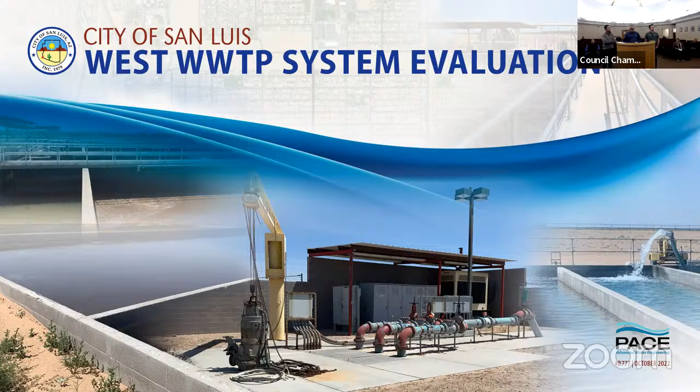As Eulogio has said, we have prepared an evaluation of the west plant for expansion. And we want to walk through some of that with you tonight. We want to look at the treatment process and the plant, identify what's there. We want to look at the deficiencies that we found in the existing plant and improvements to address those deficiencies. With that, we need to look at ADEQ's effluent requirements as this project would move forward.

Conceptual expansion opportunities and alternates is part of what we looked at as well. 3 to 5 different alternates, and then look at a potential timeline. With this, we will look at capital cost as well as a 20-year life cycle cost, where you tie capital and operational costs in together and look at that over a 20-year period.

We want to talk a little bit about opportunity that the city has in light of the Colorado River water cuts that were made to the state of Arizona, and you have water with both treatment facilities, about 2 million gallons of water a day. And so there's a potential opportunity to recognize that that's a tremendous commodity, and it's getting more and more valuable every single day because of things like the cuts going on in the Colorado River.

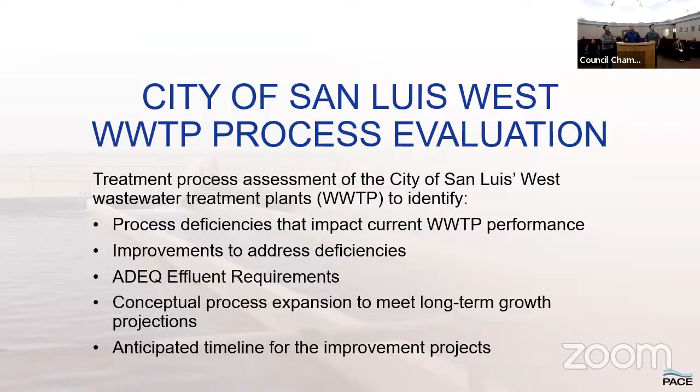And then we also want to just touch briefly on the impact of the Juan Sanchez lift station and the benefit to this project as well. So the first 6 slides we presented to council a couple of years ago when we got this initiated and started. So I'm not going to spend a ton of time, but I would welcome any questions as we go through this. It helps to understand, because we're going through a lot of information, and the more we can talk about it, the more helpful it's going to be to digest this information.

This is basically flows of the West Plant, and the things that are important to really know from all of this data is that the existing West Plant and the flows that should go to the West Plant are currently between 1.3 and 1.5 MGD, million gallons per day. And that's without diverting to the East Plant through the lift station. And that plant capacity is 1.5 million. So you're basically at capacity with that plant. That's really how all of this got started.

The East Plant has a capacity of 1 million, just to put it in perspective. And in total, with the 2.5 million gallons a day capacity, you're basically at 2 million gallons of flow going into those plants, just to give you an idea of where things are.

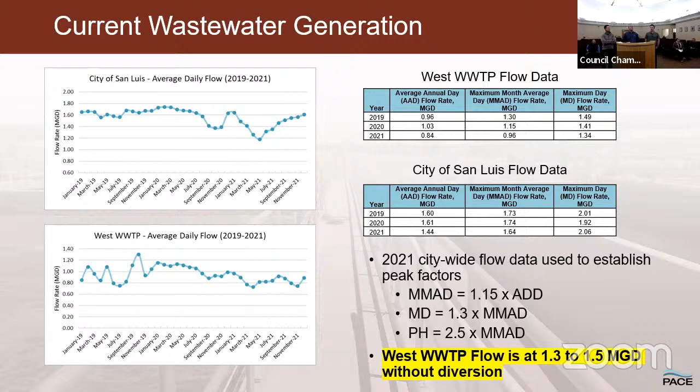So I mentioned the Juan Sanchez lift station, and the benefit of that lift station right now is currently taking 300,000 to 400,000 gallons a day to the East Plant, off the West Plant. The maximum that could be sent is 500,000 to 600,000 gallons a day to that East Plant. The benefit is that this really helps with the improvements made at the West Plant, enabling improvements without spending extra millions of dollars to provide capacity at that plant. If you didn't have this, or the East Plant, you'd have to try to do everything there and it would be more expensive at the West Plant.

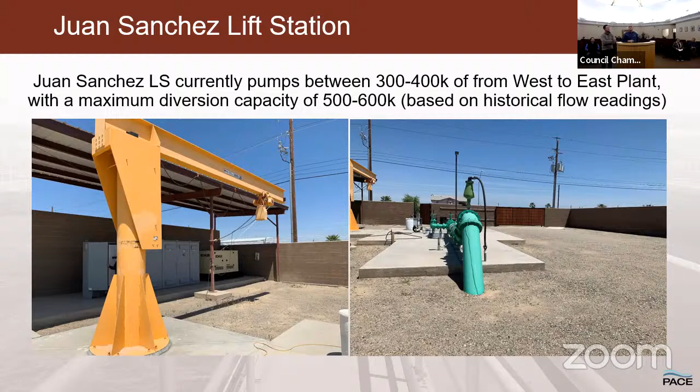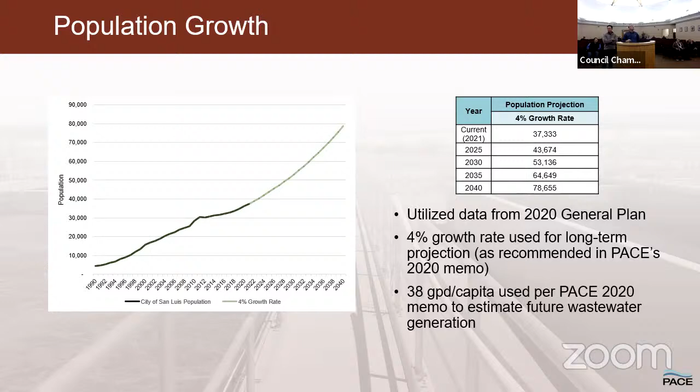So this is just to show the population growth that we utilized during our evaluation, 4% growth, which was again utilized from a couple years ago. Obviously that will vary depending upon what happens. We know that you all are growing quickly. We also took into consideration the zoning map and the open areas available for growth in the west part of the city.

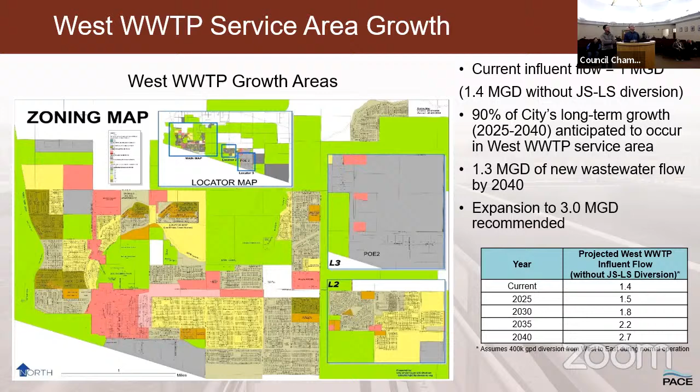So again, I said I was going to go through those quickly and I did. Are there any questions at this point? Any questions from council? Not whatsoever? You're doing okay, good. Thank you, all. Thank you.

So then what we want to do is get into a little more detail on the technical side of what's there, what we found, and what we're possibly suggesting moving forward. With that, I want to turn it over to Young Doe, senior engineer at Pace, and also with me is Taylor Pierce, project manager at Pace.

So just to introduce, I know Eulogio had mentioned names, but now we have faces with the names. Thanks, Mike. Okay, I'll go through this again real quickly too, because we have a lot of slides and not a lot of time. So basically what you're seeing up here is just the existing SBR process. SBR means the treatment process that the facility is using to treat the wastewater. I won't go through the whole process, but it's basically just a map of the site, of the facility.

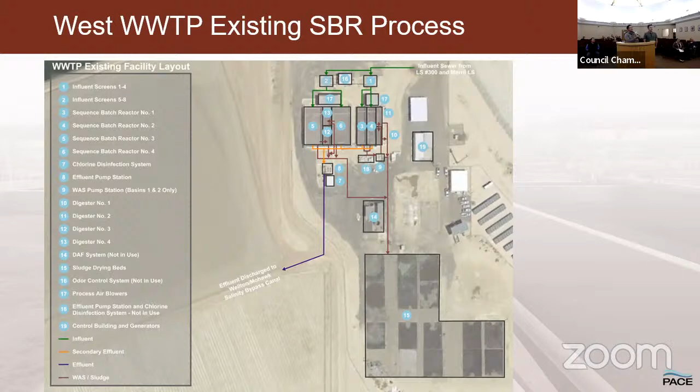We basically went through the whole entire facility and did the evaluation, looked at every single component of the wastewater treatment plant, the headworks, the secondary process. We went through and evaluated each one of them. As you can see, for the most part the facility is meeting its capacity, it's able to do what it's supposed to do. There are some deficiencies that we found, but it's able to treat the wastewater coming in right now, so that's kind of the takeaway. As we go through the next few slides, we'll talk about the major deficiencies we saw.

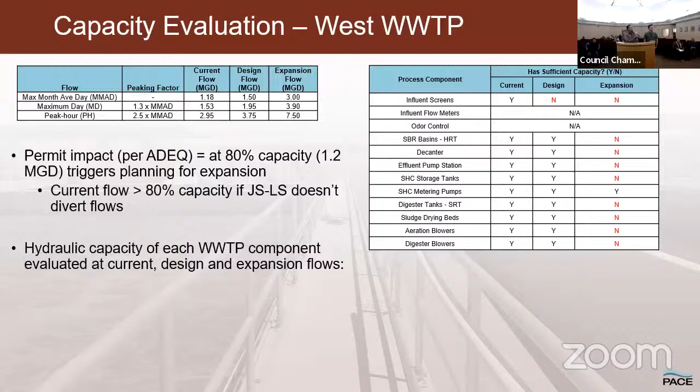The main ones we identified during the evaluation are mainly the screen, the influent screen. What we found is that even though the screen has the capacity, the flow coming into the screen is diverted in a way that one basin gets more flow than the other. There's a total of mainly 3 basins: basin 1 and 2, which are considered together, and then basin 3 and 4 are 2 separate basins. The flow is being overloaded to one side. The recommendation here is that later on, when we make the upgrades, we modify the piping to allow all the basins to get the flow evenly.

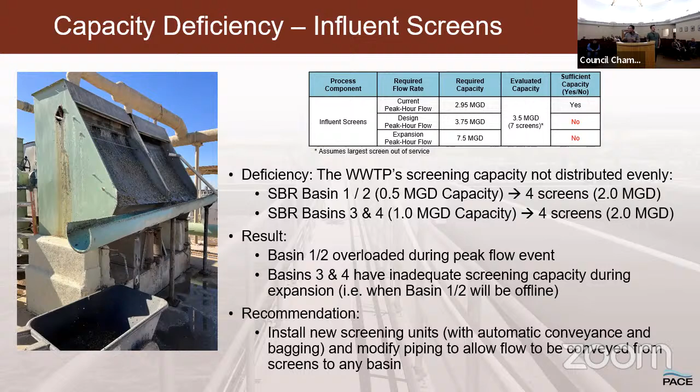And then as far as the rest of the facility, most of it has to do more with either the structure component of it or some of the equipment. So for example, we spoke about the screen, the influent flow meter isn't functioning properly, so we can't really see the proper recording of the flow coming in. Both the SBR basins, the effluent pump stations, those components, we're seeing structural deterioration in some of the areas.

And then there's some issues we saw with the chlorine disinfection system, with the piping being exposed and potentially damaging the equipment. And then in the digester, we also saw structural issues. I'm going through that quickly because in essence, all of these are issues that are concerning, but they do not impact the treatment component of the facility itself.

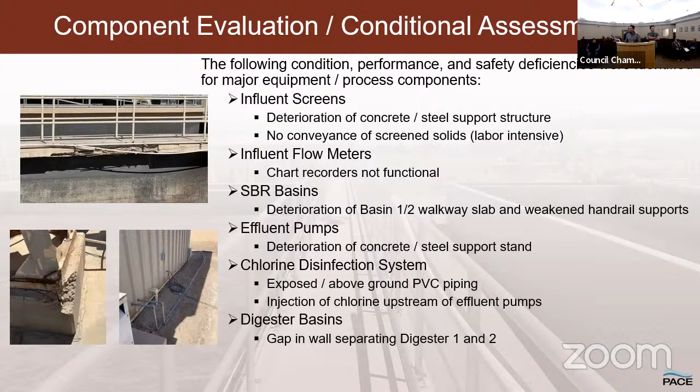So at the end of the day, what we're basically saying is that the treatment plant is getting to the capacity that it was designed for. And so now, with the growth of the city, what we recommend is to expand the facility into the next phase, which is 3 MGD. As far as all the other components we spoke about, the screens, the basins themselves, some of the equipment, those can wait, and you can make those improvements as you upgrade the facility. It's essentially the quick summary of what we're showing here.

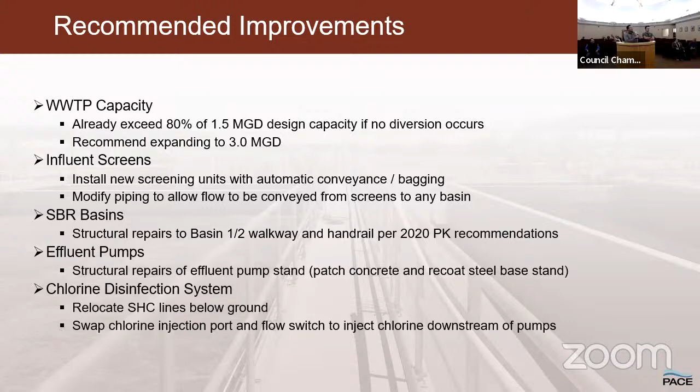And then, going back to what Mike was saying before, one of the benefits that the city has right now is the fact that you have the Juan Sanchez lift station. Because right now, if you're at capacity, you're at 1.5 MGD, the city can only treat 1.5 MGD. For you to go in there and make any expansion, there's no way for you to divert the flow to make those improvements. So with the fact that you have the lift station, you can actually divert a third of that flow, going to the east side.

And if you recall earlier, I said that the basins are divided into three - you have basin 1 and 2 that operates as one basin, basin 3, and then basin 4. So if you have the ability to divert a third of your flow, that allows us to take a third out and be able to go in there and do improvements to help expand the facility. That's the advantage that you have here, but that window is going to be closing soon as development increases in the city, on the east side.

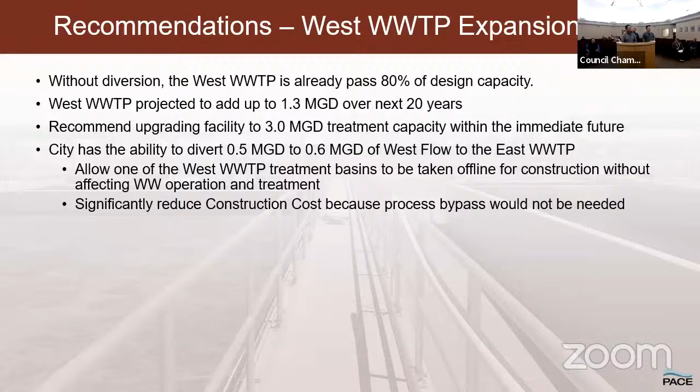On the east side particularly, exactly, yeah. And so, with that, Eloy Hill asked us to look at the different expansion options.

So what we did was we looked at 5 different treatment processes that can be expanded at the facility. And of those, we selected the MLE process, the MBR process, and the SBR process to further expand on. The reason why we didn't select the other 2, the MBBR and the IFAS, is because they required additional infrastructure that was similar to the first 3. So that just means those 2 processes would just be more cost on top of the process we discussed there.

The other thing we also have to look at is going back to what Mike spoke about in regards to the effluent quality, and the fact that the effluent is really a commodity. And so when we looked at these options, we evaluated what type of effluent it was producing, how clean, and the benefits that you can get from it.

So in Arizona, all of the treatment plants that we construct have to meet certain effluent requirements, and ADEQ requires BADCT, which is best available demonstrated control technology. Now there's another effluent level that's a little bit higher than that, it's called Class A+, which is basically unrestricted reuse, that you can use the effluent for pretty much any unrestricted irrigation and things like that. And BADCT is just one level below it. So when we evaluate the different options here, we also looked into how we can transition it from just meeting BADCT to actually meeting Class A+ as well, because this could be a commodity that the city can use in the future.

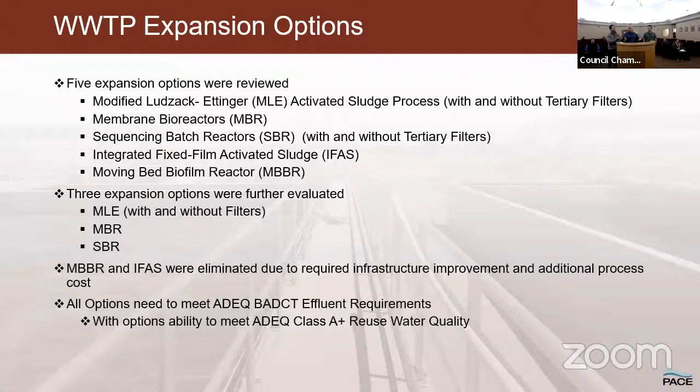So obviously you have to have the right buyer and all of that type of stuff. But the concept is to get yourself in a position - I know that in talking to Lohio, there's been other opportunities where you've had industries interested in coming and being in San Luis, but they were concerned maybe about the water or wastewater or whatever. Here's an opportunity where you can offer them 2 million gallons a day at this Class A plus quality. So just to keep in mind as we're going through this.

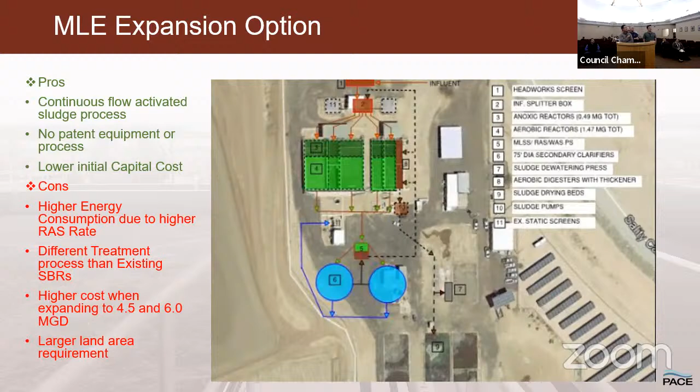What they are operating right now is what we call an SBR, a sequencing batch reactor. This process also has a higher cost when you expand further into phases 4 and 5, which is the 4.5 MGD and the 6 MGD. And then the other thing is that it also has a larger land area requirement.

So just to clarify on that, part of what our proposal and the interest was from the city and Elohio is that we look at not just the first expansion, but 2 additional expansions beyond that. Just so that you have an idea in your pocket that if a developer does come and wants to do something and you have to expand, you have a plan - here's the plan, and here's what the costs look like in 2022. So that was really the main reason.

Yes ma'am, I got a question. When you said expansions, 2 more expansions, what's the time frame? How long does that take? Until you would need it, based on current growth, over 20 years.

But if things change with development or land use, zoning, stuff like that, can really accelerate that schedule. But based on that first evaluation we did over 2 years ago, you're 20 years before you run out of capacity.

Mayor, also, one of the reasons that this was added to their scope was, in the recent past, within the last 5 years, we've received industries that have been interested in San Luis. And one of the big requirements was both water and wastewater. So at least this is covering the wastewater aspect of it.

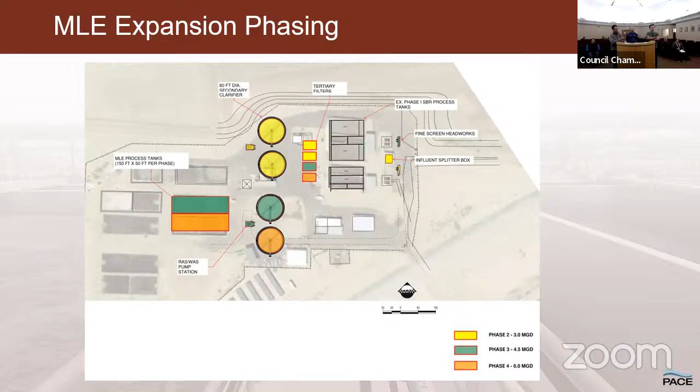So, sorry. Taylor, can you talk about this real quickly, just because I'm talking a little bit.

You've run out of capacity at the existing basins, so you're building new basins from phase 2 and then adding to it in phase 3 and phase 4. So it has the highest capital cost out of all of the options that we considered, but it is the one that you guys are most familiar with. SBRs are proprietary in that it fills, decants, and goes through a proprietary process. So that all has to be purchased through a manufacturer. And so there is a markup on some equipment when you buy that.

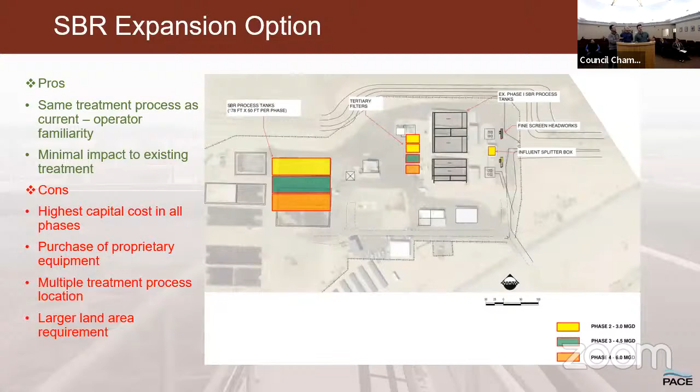It does take up a larger chunk of land, and you do have space available at the facility. So it's not necessarily a point of concern immediately, but as you continue to grow, you will start to eat into what's available there.

Yeah, so the last option here is the MBR, the membrane bioreactor. And the pros to this is it produces the highest effluent quality. And I did mention this earlier in the last two options, that the MBR is a microfiltration process, and the effluent that comes out of it is extremely high quality, a lot higher quality than the Class A+ and the BADCT that was required by ADEQ.

Now, the other two options can get up to Class A+ if you add in tertiary filtration, but that just means that you're adding additional capital costs. The MBR itself is inherently a microfiltration process, and so therefore it doesn't need any additional filtration. So again, the pros to that is the highest effluent quality of all of the options. It also has the smallest footprint.

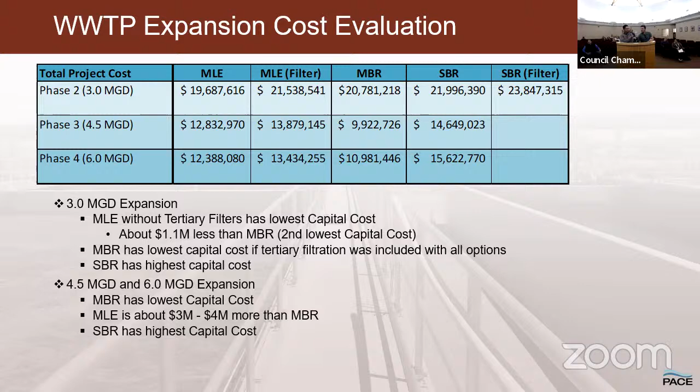Okay, go back to the previous slide. On the cons, is it slightly higher operating cost, percentage wise? Any idea? Is it 10% higher, 15? Well, as far as overall? The operating cost. The operating cost, right, it's just slightly higher than the SBR. But what's slightly? Probably 2, like 3? Less than 10%? Yeah, 10 or less, within the 10%. Yeah. So, let me just go to the next one here.

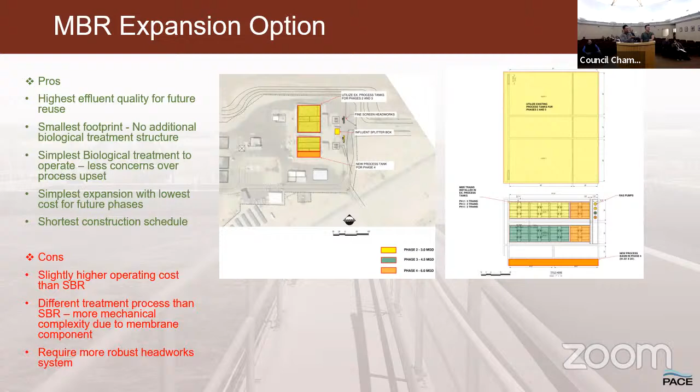But in essence, we have different costs associated with energy, different costs associated with replacement. And when you take those differential costs and do a life cycle cost, we find that the MLE is still the lowest cost from a life cycle standpoint, but the MBR is just slightly higher than that. And then the SBR is still the highest just because the SBR has the highest capital cost. So life cycle cost takes into account capital costs plus O&M.

It's important to talk just a little bit more about it: it's difficult to compare the MLE, the MBR and the SBR because of water quality. I'm just trying to make sure that everybody understands, when you compare just the MLE without the filters and the SBR without the filters, it's really not even the same water quality that you're getting out of the MBR or the SBR with the filters or the MLE with the filters. So the filters were added in those other two to give a better comparison with water quality to the MBR. Does that make sense?

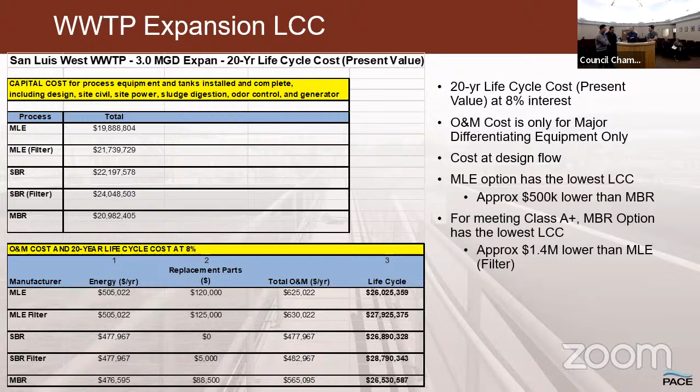In summary, one of the big takeaways from the presentation is the city has a decision to make, whether we want to eventually get into the reclaimed water business, which I think long-term is a good thing, even if it's only for our parks and green areas; water bills for parks can get high over the year. That's one of the big benefits of the membrane process. The city will eventually have to put in infrastructure to distribute this reclaimed water to wherever the users are. So that's a decision that will come down the road.

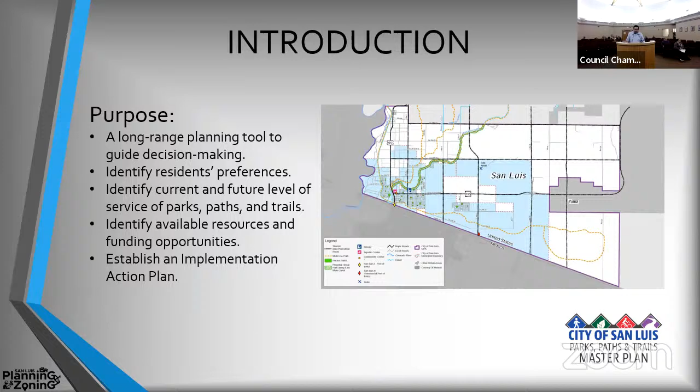So as mentioned, the plan sets the framework for the planning, maintenance, development, and rehabilitation of San Luis parks and recreation facilities, including multi-use pathways and bike lanes. It also provides an action plan for the implementation of projects, including potential funding opportunities. As part of the planning process, much information was analyzed, including previous plans and studies, demographic information. And once that data was reviewed, a recommendation and implementation plan was recommended.

So this is the planning process. In summary, it's basically just data collection, community engagement, the public hearings, and the adoption. As mentioned, the next step is to take it to the commission and city council, but I just wanted to present it to council to give council the opportunity and time to review the document. The presentation during the public hearing in February will be more extensive and more detailed.

Any questions? Because I do have a couple suggestions. Anybody on this plan? Please do. So sorry. Can you guys hear me now?

I think it's so important to our residents because some of the children ride to school on bicycles and there's not proper bike lanes for the children. And apart from that, there's people that like to have a way of getting physical, having exercise, and biking is an excellent way of getting healthy. So I would love to see this move forward because it's important for our residents to have this option of traveling, not just in vehicles, but also on bikes.